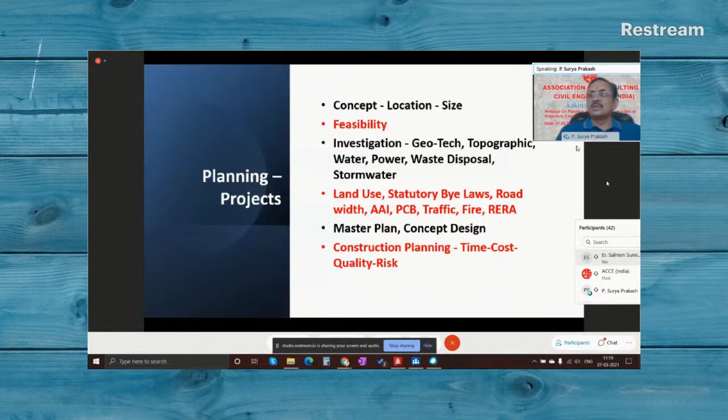And while developing the concept and master plan, we should also keep in mind the construction planning, the time, the cost, the quality assurance or quality plan, and risk assessment. This is a major thing actually. The risk assessment of the project's implementation is a major subject nowadays in construction projects. So we should also be aware of the risk associated with the project implementation.

Next is the projects in coastal districts. What are all the aspects we especially have to consider while planning projects in coastal districts? The first and foremost important point is the exposure condition, particularly when we design reinforced concrete structures. As per IS 456, we have the exposure conditions defined: severe, normal, moderate, and extreme exposure conditions.

So we have to assess the exposure, the salinity in the atmosphere and temperature variation. And if we are designing the structure closer to the sea coast, the humidity and the seawater splashing also. So we have to keep in mind this exposure condition. And then comes the marine clays. This is the biggest challenge in coastal districts whenever we plan. Normally you encounter marine clays in the coastal areas.

What is marine clay? Actually, marine clay is the soil strata which has negative SPT values. That means even when you try to fill the ground, if you fill 2 meters of earth, maybe after a week it will become zero again. So it settles very fast. So marine clays we have to handle very carefully. You should have basic knowledge of marine clays, and never hesitate to consult geotechnical experts for handling these marine clays.

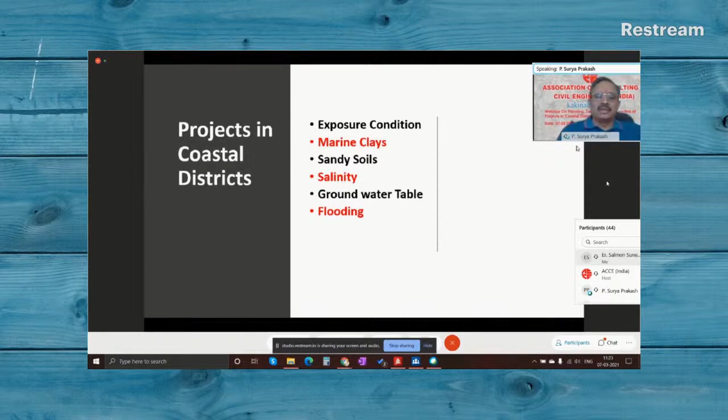So when you particularly cut and level the ground, there will be an issue of flooding. So we have to foresee that and plan the stormwater drainage for such sites, which I will be sharing with you. Tsunami is a phenomenon which we have been coming across in the last 2 decades, 2.5 decades, since 96, if I am correct.

And so tsunami is another risk factor we have to consider while designing projects in coastal districts, particularly the East Coast. The East Coast is prone to this tsunami phenomenon. And the cyclones. Every year, the East Coast experiences at least 2-3 cyclones, and now it is increasing also. Storm surge, like we had in Machilipatnam district, in the mid-70s, if I am correct. There was a big storm surge actually.

So whenever we design projects in coastal districts, the storm surge also we have to study, and ground improvement is a compulsory thing we have to consider for economical and effective foundation design. Dewatering systems. When we handle projects on the sea coast where we have shallow groundwater, we have to do dewatering. Normally the practice in coastal districts is a suction ring main. We put bore wells up to 2-3 meters depth, prepare a ring main around the building, and then we suck the water.

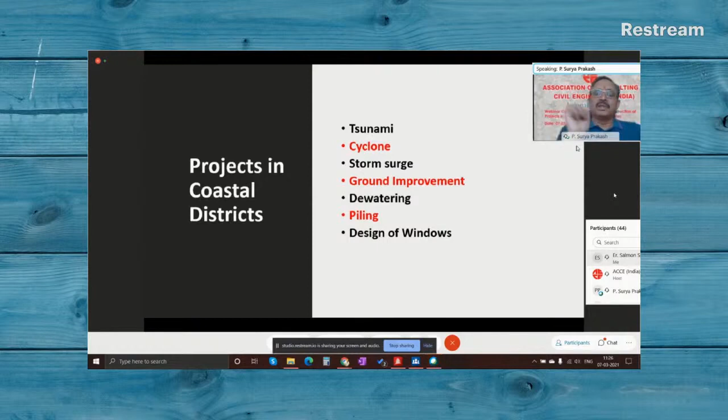Because we design the building for a closed condition, the percentage of openings has a bearing on the wind pressure coefficient we consider. But if we don't design these windows properly and they fail, the openings in the building will increase. And so I have come across many buildings failing because of windows not being designed properly.

Next, sheet piles are another method. In Mumbai, they are very widely used. You can use sheet piles to cut off water ingress into the construction area. Sheet piles or touch piles is another. In Vijayawada and many project sites, we have used these touch piles. Next is jetting, jetty piles. That is, we use a water jet to drive the piles when we have to do piling within the sea coast. Jetting is the method I used about 27 years back in one of the projects in Tupilpalam, Gudur district.

And corrosion is another major issue if we don't take care of exposure conditions and treatment of steel structures, particularly painting. Most of us make a mistake about the application of primer and protective coating. As per code, when we apply primer to any steel structure or even a concrete or cement surface, we have to apply the first protective coat within 24 hours.

Because the objective of applying primer is to neutralize any surface that is exposed to the atmosphere. If you don't apply the protective coating within 24 hours, the neutralized surface will not remain neutral. It will again become basic or acidic. So it's a very important aspect to specify painting of the first coat within 24 hours of applying the primer.

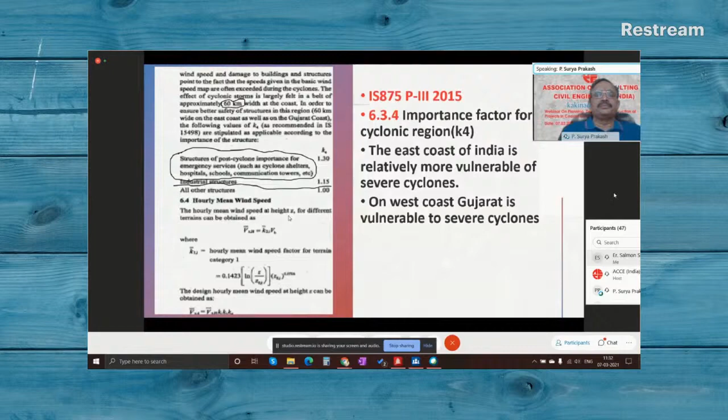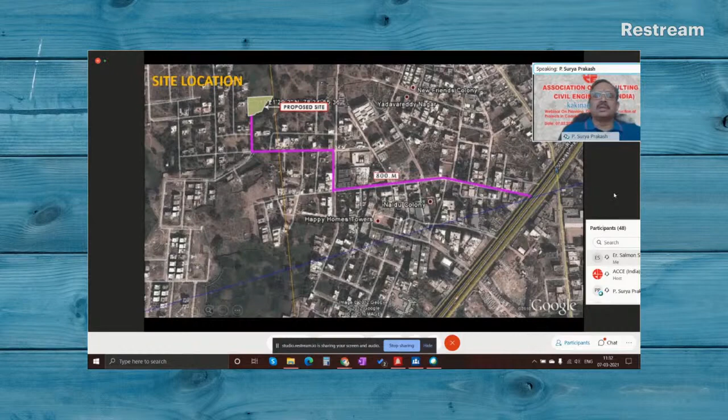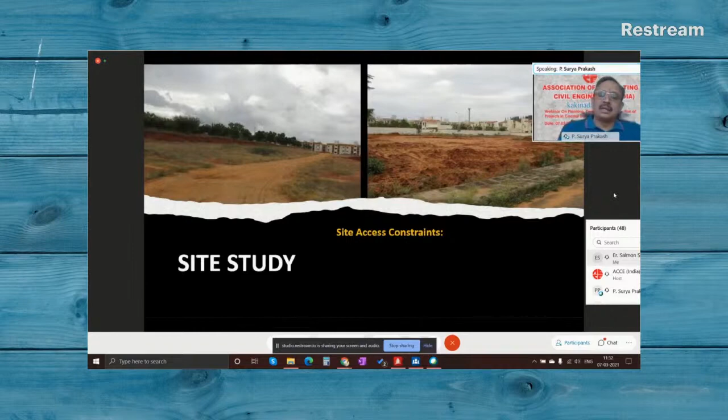Next section that we are talking about is the planning. Whenever we plan the projects, we have to identify the site location and approach to the site from the nearest highway to check the lead and the time taken for transportation. Next is the site access constraints. Sometimes we don't even have culverts that are designed for the trailer loads that carry the materials to the site. So it's very important to understand the access to the site before planning and before drafting the design basis.

Next is the investigation. We have to plan the stages of investigation. The preliminary stage is information to check, investigation of soil, geotechnical, borrow pits, and backhoe pits also. We do this to understand the site in the preliminary investigation, and sites for disposal of surplus earth and topographic survey.

Sorry, somebody by mistake, I think, is sharing the content. Please remove the permission to others to share content so that we will not be disturbed. I'll start. Sir, please continue, sir. Do you have my PPT or should I share now? Sir, please share, sir. Oh, I have to share. Okay. Thank you. So I request you to cancel permission to others for sharing, otherwise we'll be disturbed. Yes, sir. Already done, sir.

Thank you. And geological studies. This is a very important aspect. For all important projects like power plants, we have to study the geological history of the site, so we have geological experts who study it. We all know the Koyna Dam story, where it was built on the Koyna fault, a geological fault, and it resulted in the earthquake. Similarly, environmental investigation, wind roses, climatic conditions by meteorological data.

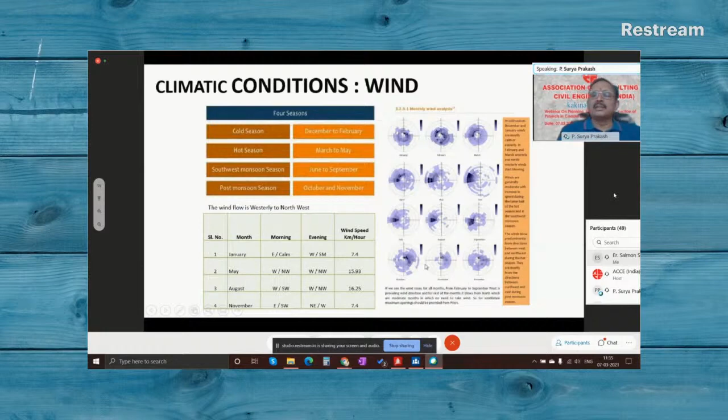So this is a typical climatic condition data, month-wise: cold season, hot season, southwest monsoon season, and post-monsoon season. So we have to have the wind roses like this to understand the direction of the wind. It will help us in planning the structures very effectively.

Next is the sampling of the soils. We must insist on proper investigation. Particularly, I have seen some of the soil reports: at half a meter they encounter refusal strata and leave the investigation there. Even if it is a hard strata, for important structures we have to collect core samples and have the RQD value, rock quality designation. It will give us an idea of the costing of rock cutting and the method of rock cutting, and also the soil bearing. And the calculation of the bearing capacity in hard soils is also a very important factor.

I have come across people using very high factors of safety in estimating the bearing capacity for the rock sample. The method of estimating bearing capacity in the rock is to do the crushing strength, and from the crushing strength apply the factor of safety, and then over that you apply a further factor of safety for the safe bearing. Ultimate bearing, one factor, and then safe bearing, another factor.

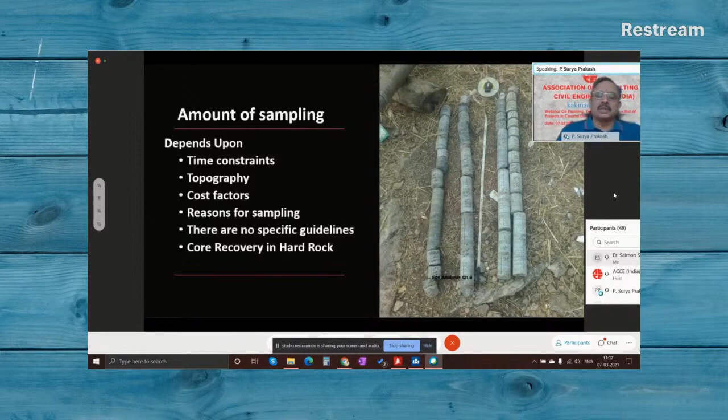So time constraints, topography, cost factors, reason for sampling: we have to decide the sampling very carefully. There are no specific guidelines given in the IS code, but as engineers, we have to plan the investigation depending on the requirements of the project and the core recovery of the hard rock.

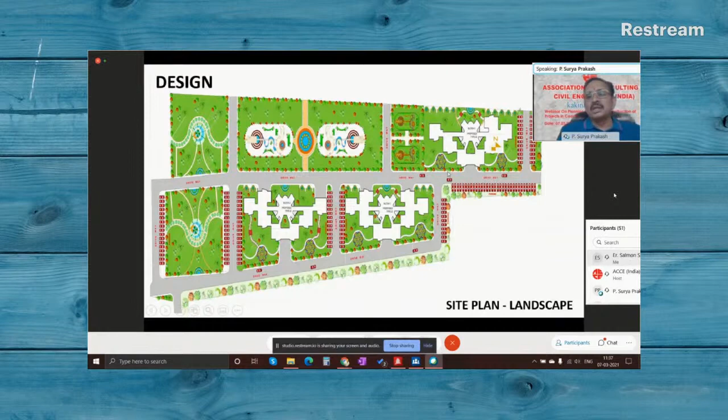So this is a typical master layout. You can see these are the proposed areas in Kudankulam. Actually, we had the opportunity to participate in the design competition, and this is the master plan we did. So the master layout is very important, and then a detailed layout, concept design of each area with the traffic and parking, greenery, and other amenities and utilities we have to consider while planning the layout.

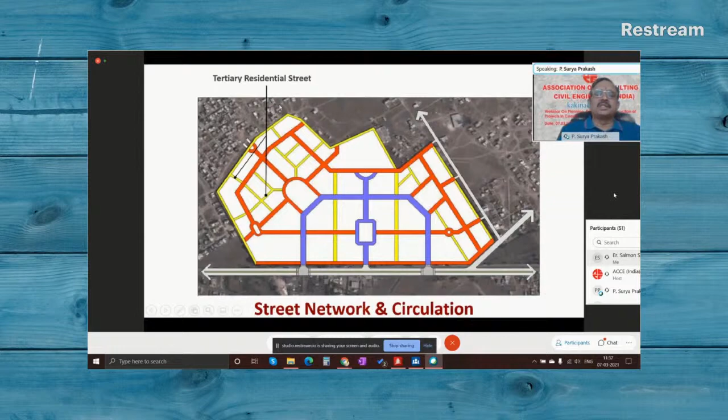Next, the street network and circulation is also part of the master planning which we do. The primary roads, secondary roads, and tertiary residential streets, we have to plan for the traffic circulation. Next comes the building circulation. So this is the units access. You can see this is the shortest path to reach each apartment. We have planned and shown this access, how fast it is, and with a lesser lobby area we can access the units very fast.

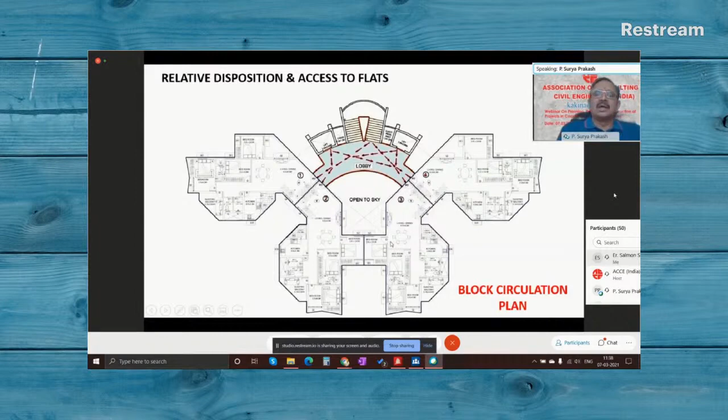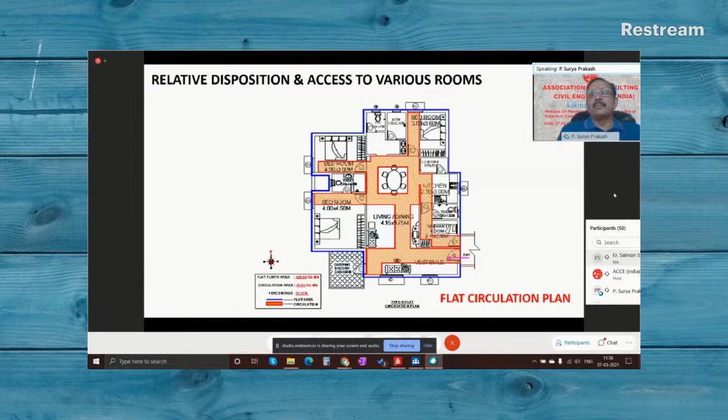And similarly, within the unit, what is the circulation area? Effective area versus circulation area. So these are all the calculations. We have a percentage of circulation of 31%. Here you can see flat circulation. Apart from that, carpet area versus plinth area versus common area, super built-up area, and carpet area versus circulation area. These are all very important, so we must consider these aspects while doing the planning.

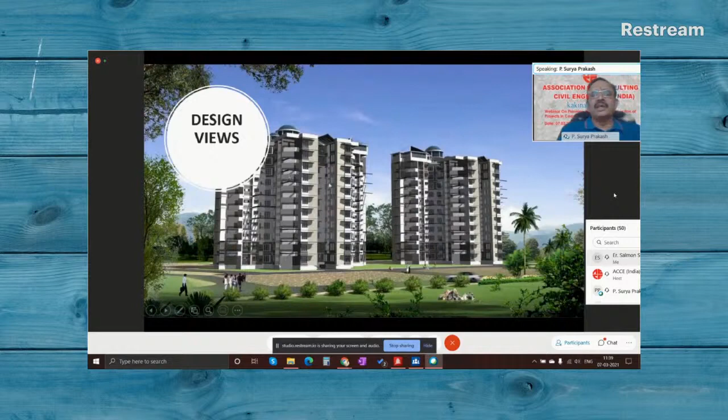So design views: this is the planning done in Seacoast, that's why I'm showing it. We thought that every dwelling unit should have a view of the sea. That's how we planned. Coming to the design, architectural, civil and structural, and MEP: the functional requirement document, FRD, considers the design intent of the client; the requirements are defined in this document. Based on that, we prepare the design brief, whether it is finishes, facade, or functional requirements like toilets or area allocation.

Based on that, we do the design development and coordination, bylaw standards and codes, space, material specification, finish, utility areas, facade, and external services like amenities, landscaping, parking, entry gates, driveways. These are all the things we have to consider in the planning. And detailing, quantity survey, costing, and product specifications. Vendors also we have to consider in the design stage itself. And the financial, technical, and tender approval for procurement before going to the construction stage.

Next is the construction engineering, procurement like contract packaging, site enabling, method statements for execution. I always say that we should never leave the method of execution to the engineers on site. The contractor's planning engineer should prepare the method statement for each activity, whether it is excavation, marking on site, RCC, or waterproofing, and get the approval from the consultant. We have implemented this in projects, so there is no misunderstanding of the drawing and the method of execution. And stage passing is part of construction supervision, where at every stage there should be stage passing done by the engineer in charge on site.

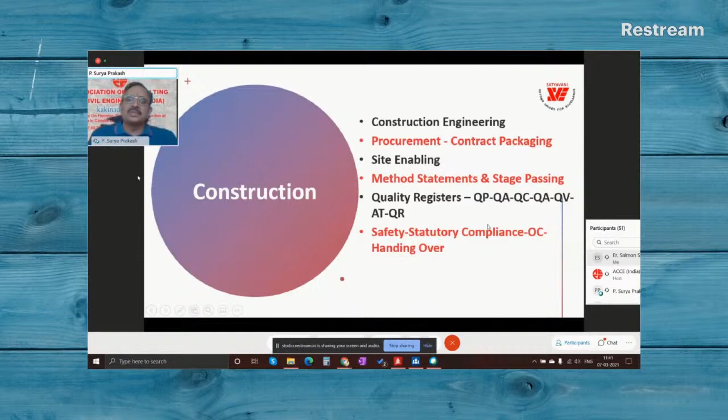Safety, statutory compliance, occupancy certificate, and handing over. So these are all the steps that are very important. So now getting into the core topic of today, that is projects in coastal districts done by our company, case studies where I'll explain the contribution that we have done for various coastal projects, so that it will help you to consider these aspects while planning projects in coastal districts.

So I'll share the highlights. We are used to reading headlines in the newspaper, so same way I have put the highlights of each project so that when we go to that project, I'll share those details. So PalmTech is a project we did in Pedapuram, which is about 50 acres of land, which is sloping towards the highway, and the client wanted to have the leveled ground, and we have foreseen that flooding will be an issue because the project commenced in the month of July, and we all know July is a month with maximum rainfall in East Godavari particularly, and so we have planned the stormwater drain, and the client was joking with me in a lighter vein that you are doing an irrigation project instead of an industrial project.

I said, sir, this is very important because we had a very stiff timeline of 9 months completion for that project. We did the foundation stone and all in July, and it so happened that July month had the highest rainfall of 100 years. So fortunately, because we have considered and constructed the stormwater drainage before commencing excavation itself, my client sent me a photograph of that drain with full water, and said, good you have foreseen this situation. Otherwise, our project would have come to a halt. Imagine 50 acres filling with water, and if you have to do dewatering, you could never complete the project.

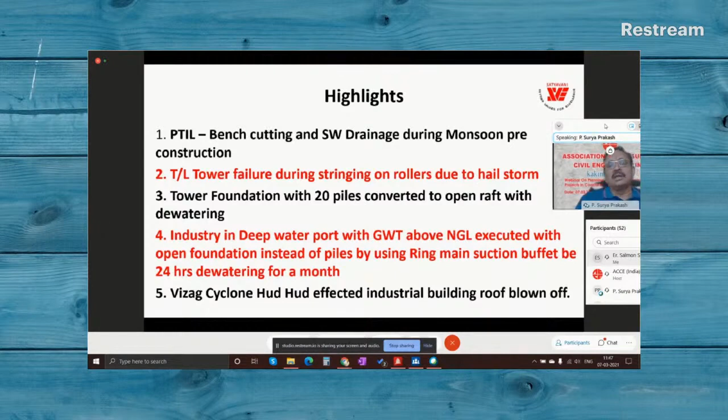Next is the industry we did in deep water port in Kakinada, Arani Agro Oil Industries, now Agrawal Industries. The client wanted to go for pile foundations there. But when I reviewed the soil report of that site, I found that up to 6 meters depth there is a good strata, and beyond 6 meters it is marine clay. Normally we go for pile foundations when the hard strata is at a deeper depth, but here the marine clay extends up to 30 meters depth from 6 meters. So it is never economical to go for pile foundation in such a case, because industrial sheds have less loading compared to normal buildings. So I suggested to the client that we go for open foundation with the dewatering system.

I showed the calculation in a value engineering report where we were saving 20 lakh rupees, apart from saving time, because we could complete the entire foundation system within a month by maintaining 24-hour dewatering for that site. Unfortunately, I couldn't locate that photograph because it is more than 20 years old. But we could maintain the dry condition for a whole month and completed the foundation, and the client was happy because we saved cost and time.

Next is the Vizag cyclone Hudhud affected industrial building. The roof was blown off - a very surprising incident in Vizag, a structure designed by us. When we investigated, we found issues with the anchor fasteners, the self-tapping screws used for the roof sheet. Even the Vizag airport roof was blown off during Hudhud. So it's very important to specify the anchor fasteners and test them.

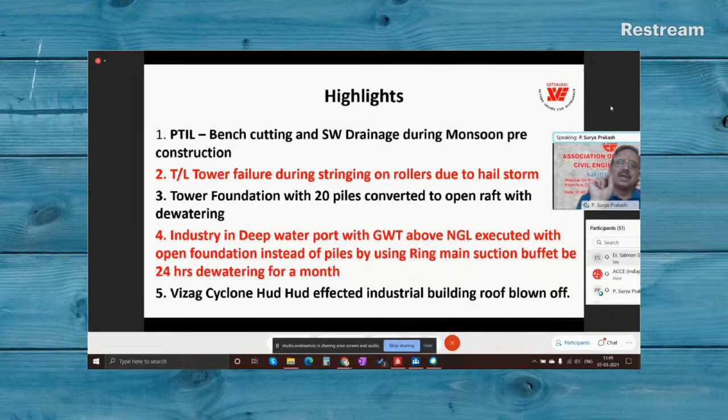The washer that we use and the tightness has to be specified and checked very carefully, particularly Hilti fasteners with neoprene washers. We have to use neoprene washers, not rubber washers, because the cost difference between neoprene and rubber washer is significant, and contractors tend to go for rubber washers. So we have to check these washers also, because rubber washers get decayed with water exposure, whereas neoprene is a material that stays for long. So it's always better to use neoprene washers.

That is very important. Next is the power distribution poles. We were consultants for Government of Andhra Pradesh for hazard mitigation and cyclone recovery, an emergency cyclone recovery project. I'll share some photographs where the distribution poles, normally put along roads and canals particularly in East Godavari, are found inclined. Normally these poles' foundations are not designed properly. We have to design it as a stem foundation, meaning we have to use the shear modulus of the soil for design of this pole foundation.

Next is the plinth level for towers in paddy fields. This is another thing we observed - most of the towers had corrosion in the bottom stub portion right above the plinth level, because the plinth level used to follow 230 mm, 9 inches above ground level. In paddy fields, if you see the watering they do, the water itself will be about 1 foot. And imagine if there is a rainy season, the water level will rise, and because of the exposure condition there will be extensive corrosion in the leg, which is important. So we have specified an increase in the plinth height.

Next project we did is in Cochin, Hyquip. There is marine clay, and we started the ground leveling, and it used to sink. So we used prefabricated vertical drains so that you take out the water as you fill the soil. This is a ground improvement technique which we adopted, which I'll also share.

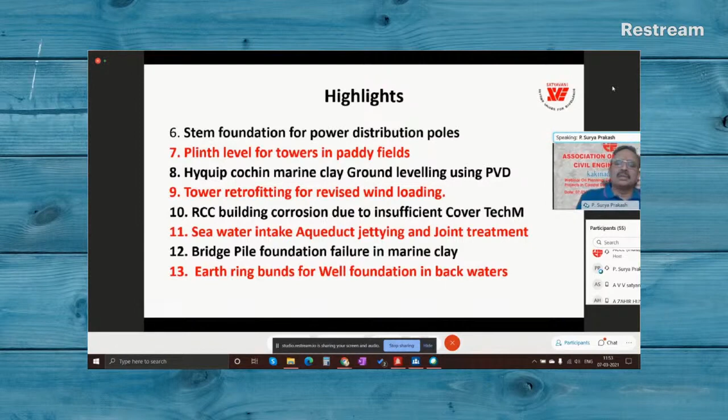Earth ring bunds for well foundation in backwaters, and roof sheeting anchorage - clamps, screws. Nowadays we have standing seam, seamless roofs, where we use clamps, so we must check and inspect these clamps very carefully. If using screws and washers, we must check those too.

For expansive swelling soils, proper design of piles, or treat the foundation soil - that's very important. No saline water should be used in construction, so check the water quality in coastal districts, and provide treatment if required to remove salinity in the soil. We mostly use sulfate resistant cements in coastal regions.

In fact, in our very first project back in '94, we used sulfate resistant cement. Seashore sand must not be used - that is very important. Many people tend to use pit sand, which is also not good. We have to use sand conforming to the gradation specified in IS 383.

Scouring is another important phenomenon. On the sea coast you will have scouring of soils, erosion, soil erosion due to wind. We have to consider these aspects.

Uplift anchorage at every stage of load transfer and side thrust is very, very important, because industrial buildings particularly will experience uplift in the structure. We have to check the anchorage, do uprooting tests, and check the foundation and structure at every stage, because cyclonic winds will lift the structures. So we must check uplift anchorage at every stage.

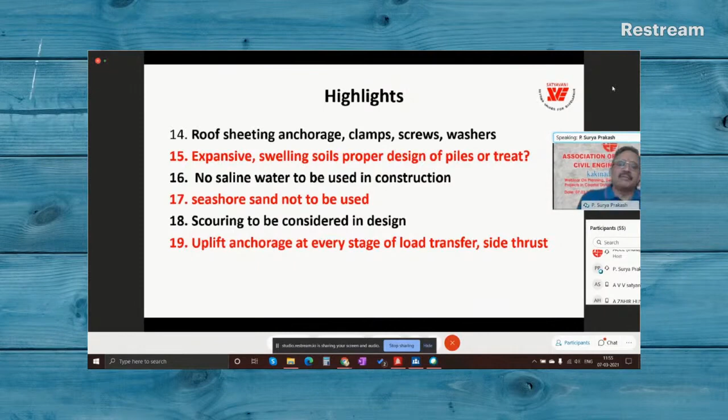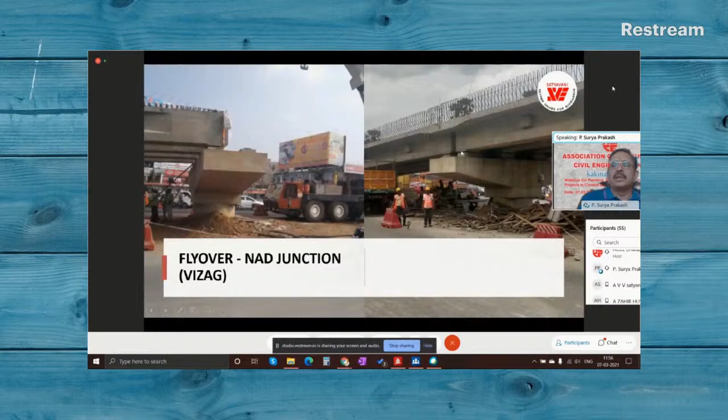Now I'll share photographs of the projects. This is a flyover rotary management system we are doing in Vizag, nearing completion. We have completed the design and execution is in progress. This is the NAD junction rotary management system with precast I-girders - this is the design we did.

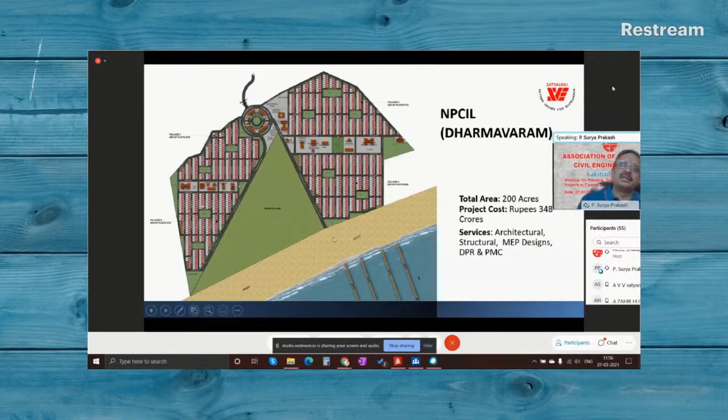This is in Srikakulam, where we are doing a township for which the DPR has been approved - a 350 crore project with 2,000 houses. This is on the sea coast, and there we have planned a fishing harbor kind of facility for the fishermen who are going to live here. These are some views of this project, and while planning we considered all these aspects.

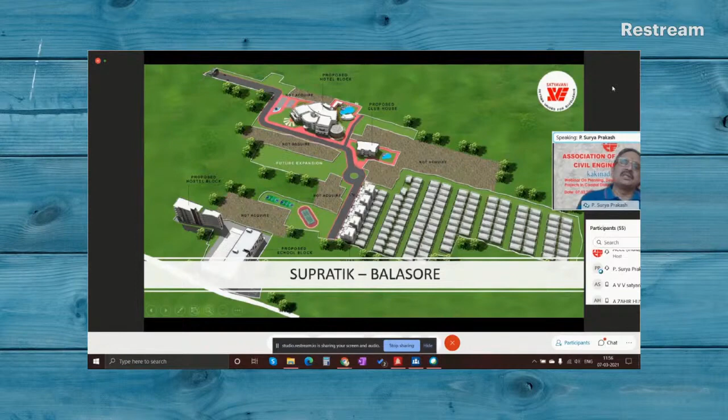Next is Balasore - we have done about a 60-acre project. It's a master plan with villas, a school, and a star hotel with a convention center, which was planned by us and executed by the client.

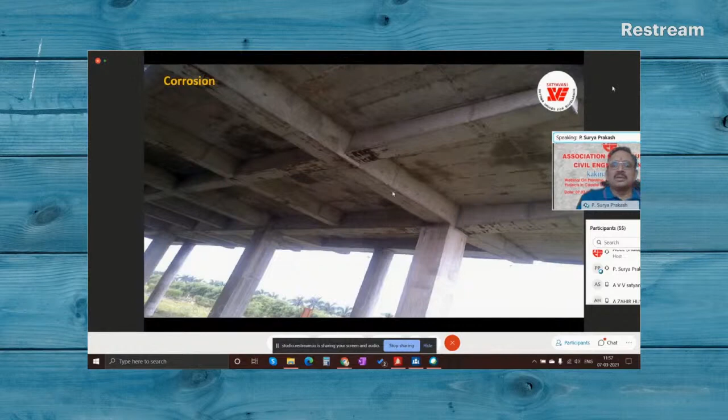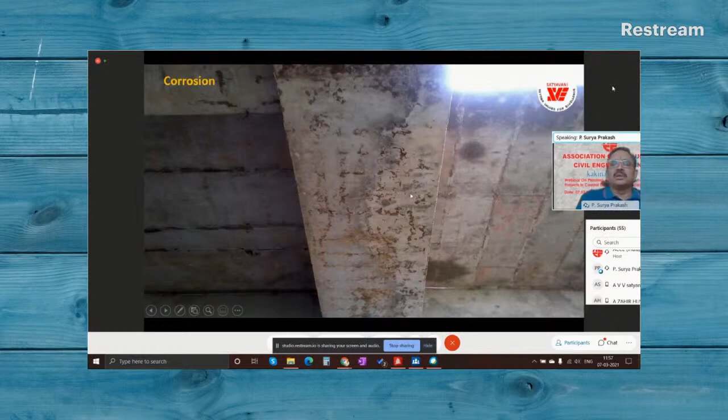You can see this corrosion of stirrups and the main bars in the beam due to corrosion. And this is the column - you can see the ties, column ties, and the main bars. You don't even need to do a profometer test to see it.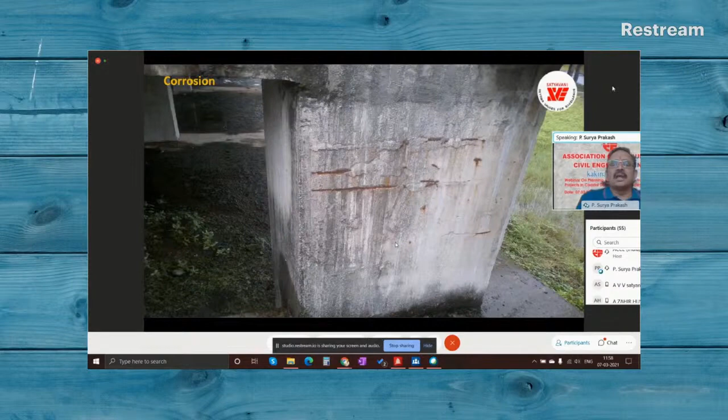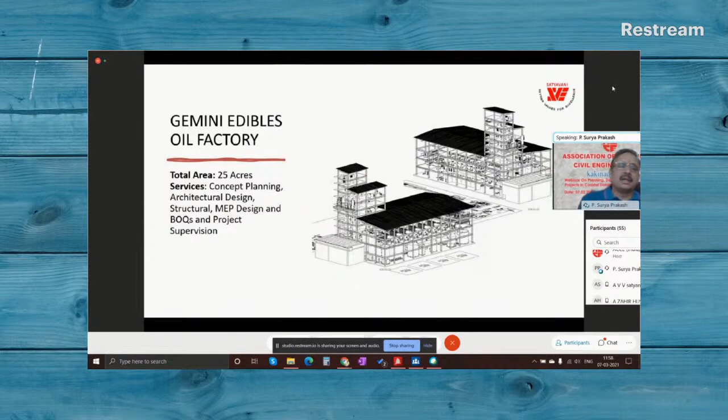This is another edible oil factory we did near Kakinada. This is also a completed project, a steel and composite structure, recently completed last year. These are the pictures of completion.

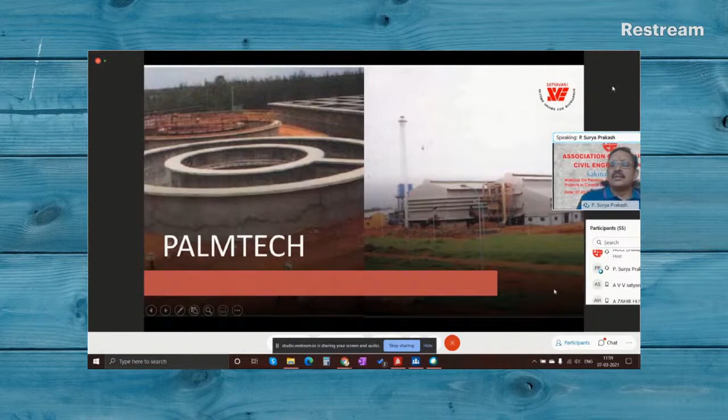This is a palm oil mill project in Pedapuram near Kakinada. This is where I said we had stormwater drains. This is the layout of the project. We have 50 acres, so we did these stormwater drains before even commencement of the work, and this whole area was excavated to make a level ground. You can see this stormwater drain here. During construction, a 3-meter width and 3-meter depth drain was executed, and it worked perfectly.

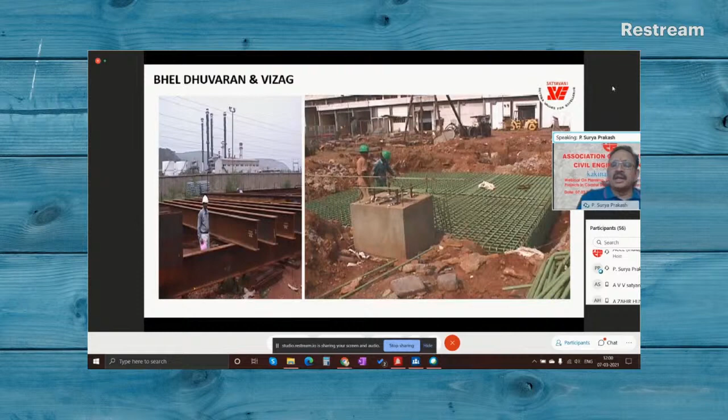In Vizag, we did a gas turbine project for HPCL through BHEL. You can see we used protective coating to the rebar in the foundations and structure. This helps in reducing the corrosion we saw before with protective coatings, but in implementation, we have to ensure the painting is done adequately. This is the HPCL power plant.

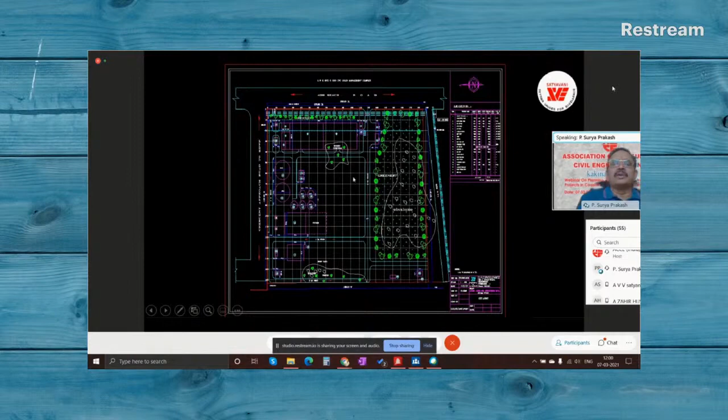This is the layout of the project, which is on the sea coast, and the ground level was half meter below the sea level, mean sea level. For this entire plant area, we did the dewatering system and maintained dry condition at 2-meter depth, in spite of the water table being above the ground, and we could successfully complete it.

These are photographs during construction of this Arni Agro project. You can see the ground, it's all moist ground. In spite of that, we could maintain dry condition and completed the project on time.

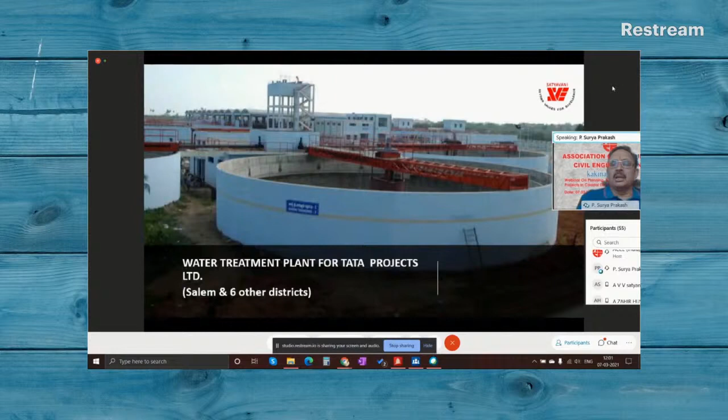These are the water treatment plants and sewage treatment plants in Salem and 6 other districts in Tamil Nadu, which we have done, about more than 100 crore project. We did it for Tata Projects EPC project, as EPC consultant.

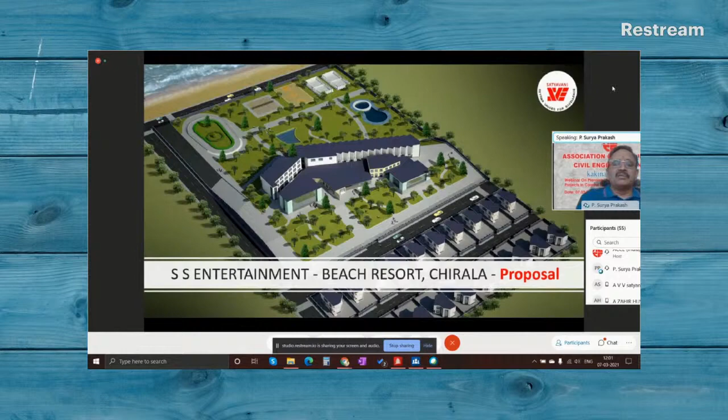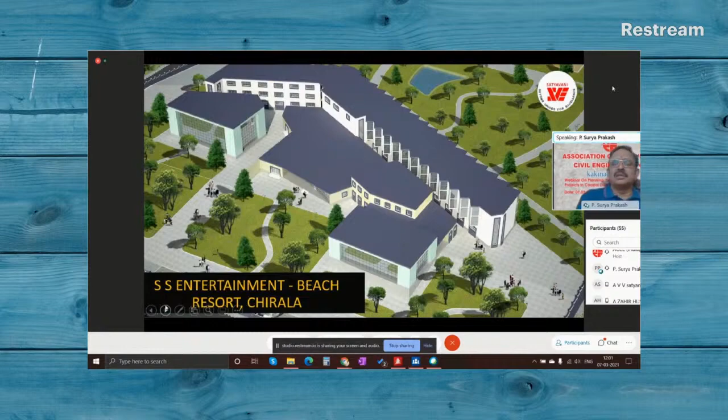This is another resort proposal we did near Chirala. This is the concept we have given, to ensure every room will get the view of the sea. That's how it is planned. And there are other options which we have done for the beach resort.

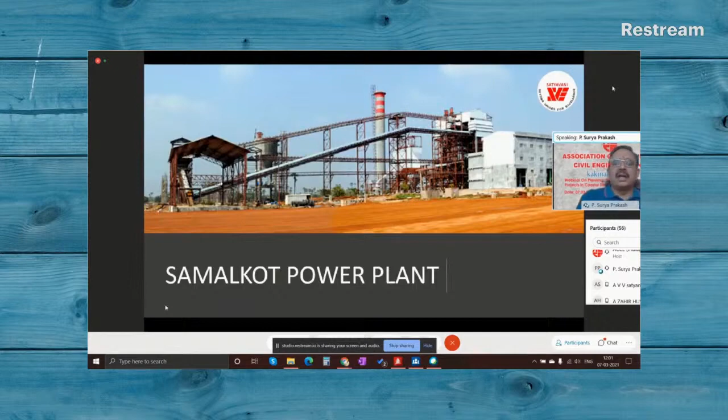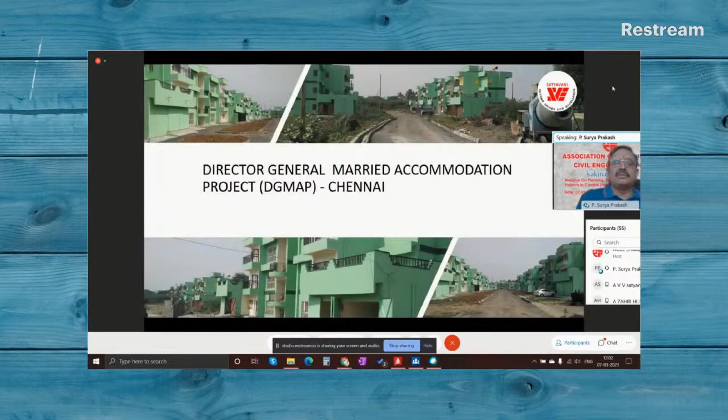This is a Samalkot power plant, balance of plant works we did. And housing we did in Chennai for defense. This is married accommodation project. These are all the completed photographs of this project in Chennai, this is the married accommodation.

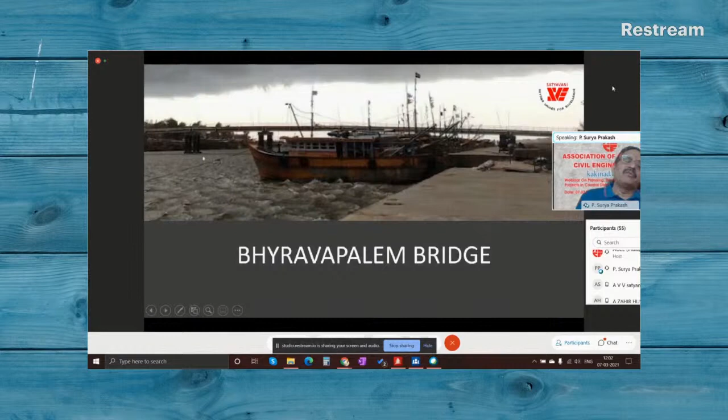This is a bridge we did in the backwaters at Bhyravapalem, mainly for cyclone evacuation and AP hazard mitigation. Here we used the ring bund and well foundation, caissons. This is the photograph of that.

In Nellore, we again did hazard mitigation bridges for the irrigation department. And this is a mall and multiplex in Ongole, where we used precast driven piles, not bored cast-in-situ piles, so driven piles are used here. Because here too the water table was at 2-meter depth, we didn't go for open foundation, and we used precast spun concrete driven piles.

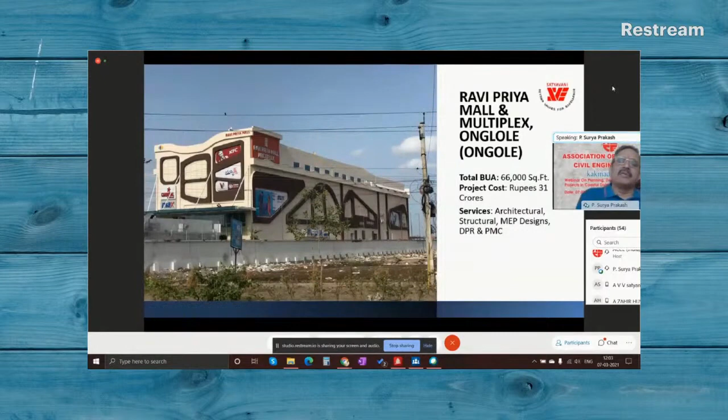And interim capital of government, Andhra Pradesh - we also did the RFP for Secretariat. This also comes under coastal area. The structure is designed for 8 floors, but they have executed only 2 floors.

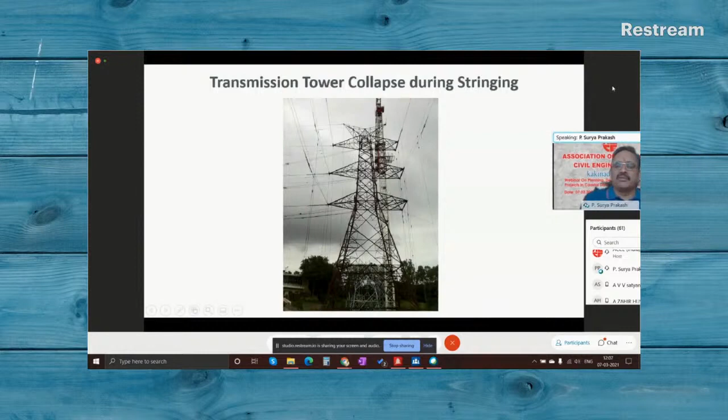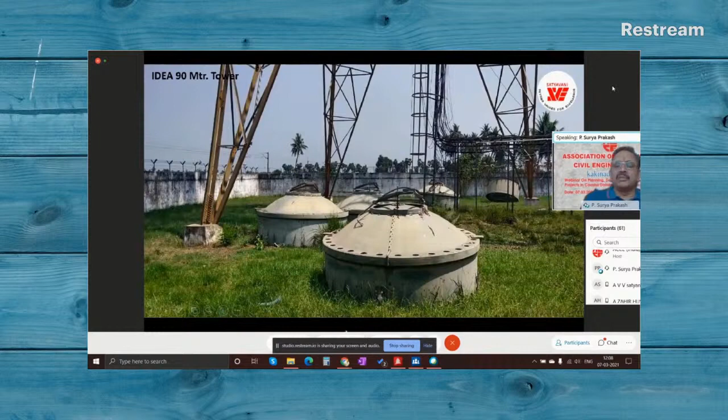So this is the 90-meter tower I was talking about in Kakinada for Idea Cellular. It's a tower designed by us, and the foundation in Kakinada, because we had to convert from pile foundation to raft foundation, which was successfully executed. So this is the foundation in a sandy soil. And this is the drawing for an annular raft. With the concept of annular raft, we did the tower foundation as a raft foundation.

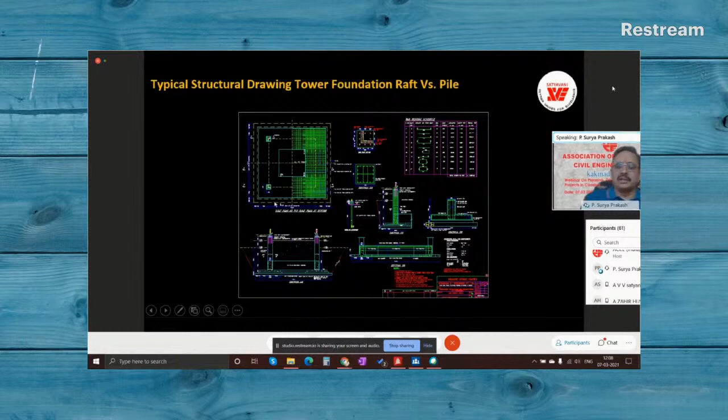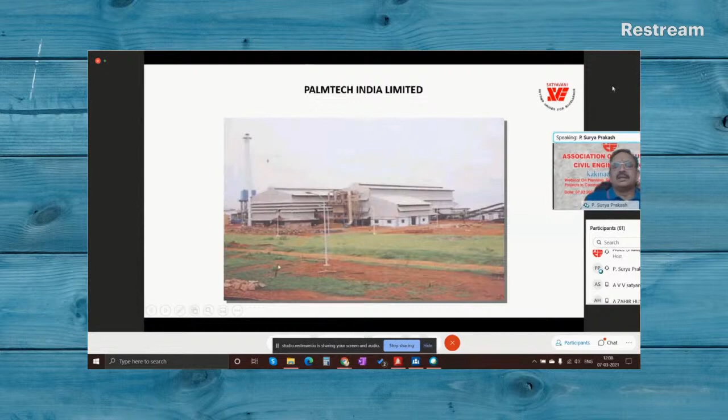This is the palm oil mill I was talking about, which we completed 6 days ahead of schedule. So you can see the stormwater drain here. And these are the oil tanks. Oil tanks are an interesting foundation; we always design with hoop tension. The force transfer is by hoop tension because the bearing is not critical here because it's oil. So ultimately we transfer the load by hoop tension.

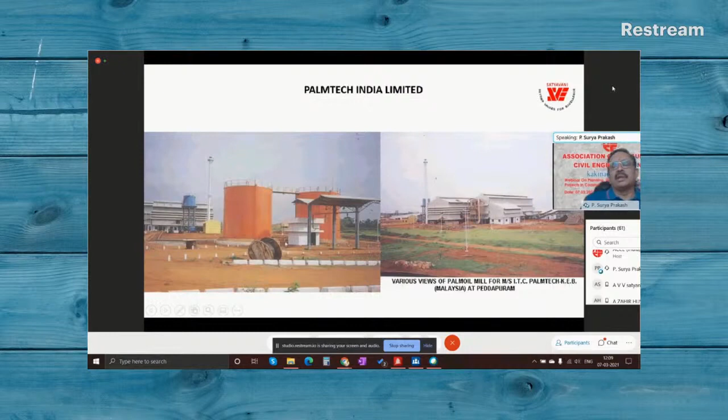So here we just make a ring beam, fill it with sand, and on the sand we put the bitumen carpet and erect this steel structure, because the whole load transfer is by hoop tension, because the weight of oil is less compared to water even, and so the bearing is never a critical thing. So very interesting design. This is the aqueduct I am talking about near Gudur in Nellore district.

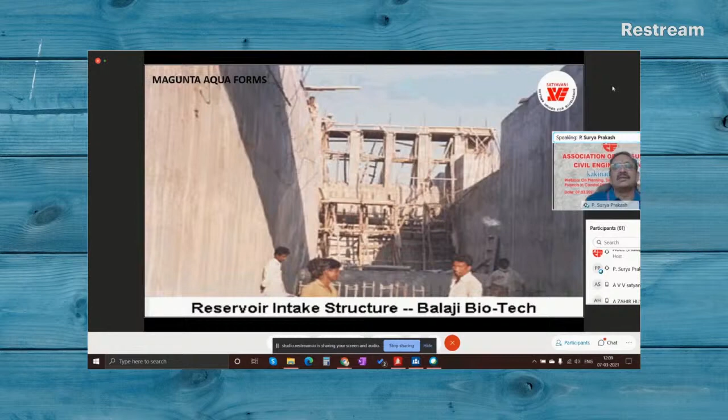So this is our first project done by our company, a 1.2 kilometer long aqueduct with seawater intake. You can imagine the cover aspects, the protective coatings, water barriers and expansion joint treatment in this were all challenging. So we have successfully done it. And these are the photographs during execution about 27 years back.

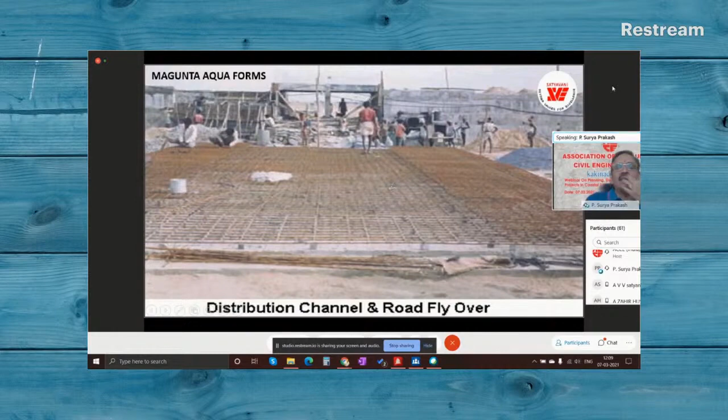So this is a flyover over the water aqueduct, and we have designed the aqueduct with adequate cover. The latest we did was last year during the lockdown period. We did the review of the DPRs for the fishing harbors in 4 locations in Andhra Pradesh.

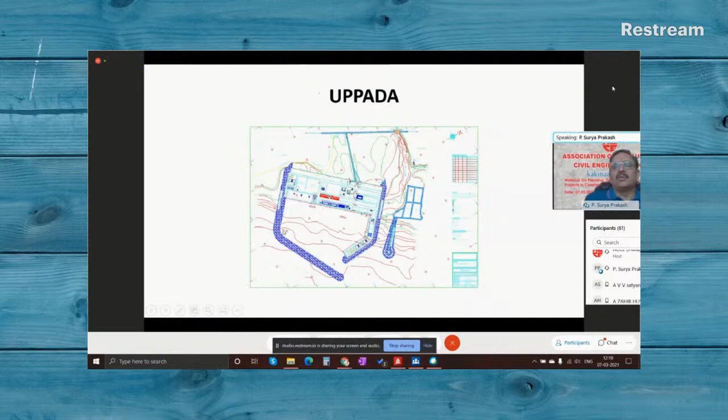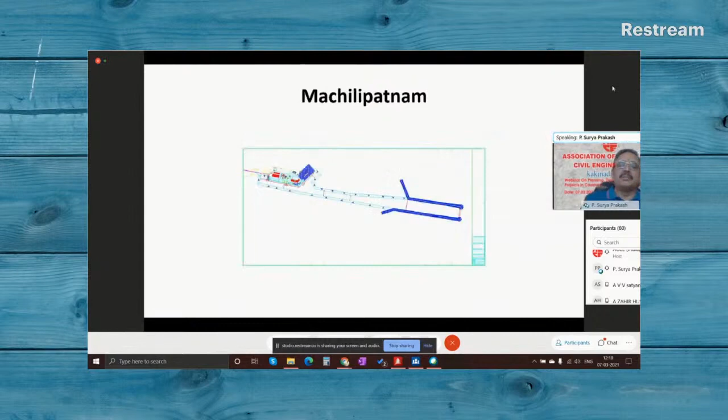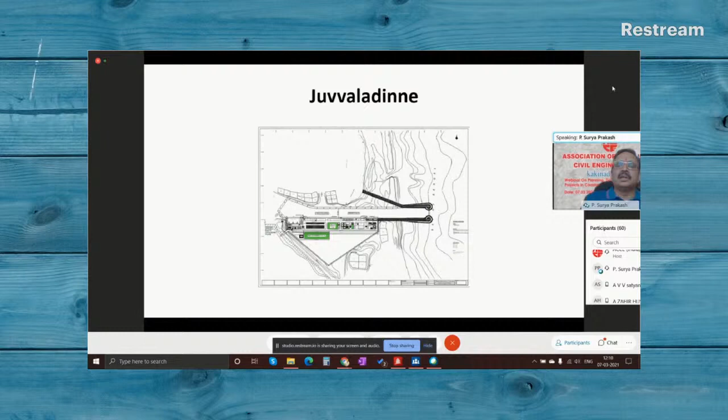So this is Uppada near Kakinada. So this is the fishing harbor, and this is the breakwaters. So we have done the DPR validation and submitted. And another fishing harbor is in Nizampatnam, and another fishing harbor is in Machilipatnam, and last one is Juvvaladinne. So these are all the 4 fishing harbors for which we did the review of the DPR and submitted.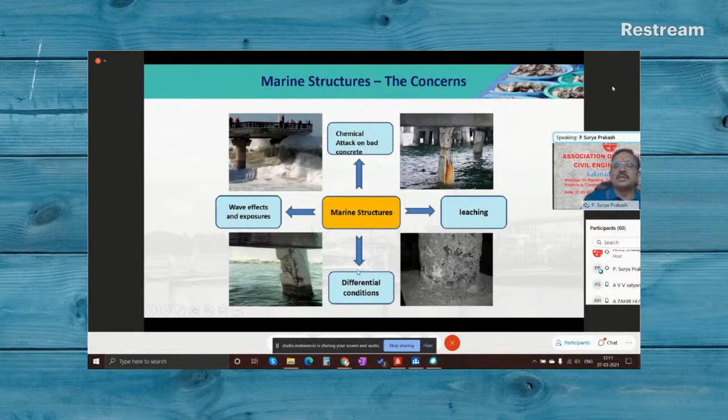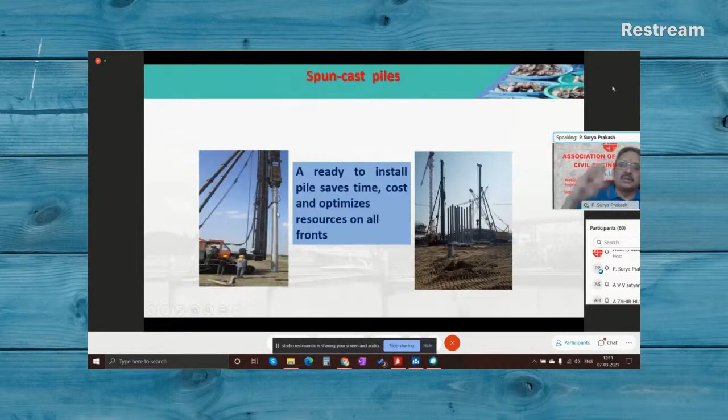So we proposed this spun precast pile in that project for all the backwaters and foundations for the structures. So these are factory-made piles, so they will have very good resistance, and the grade of concrete that we can achieve with the normal mix design is M80 grade because of the spinning that we do. And this is the method of preparation of this spun concrete.

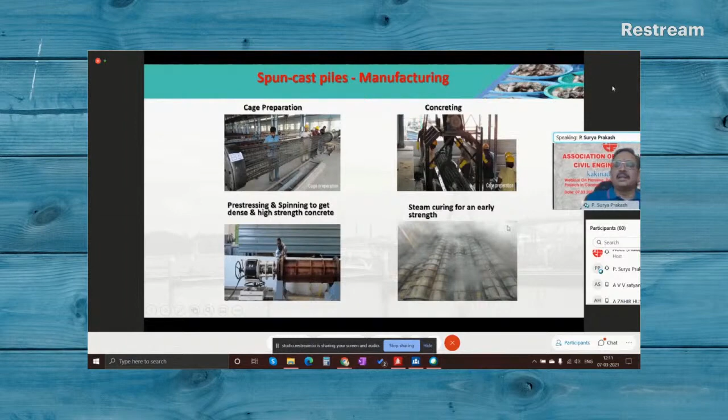I'm associated with the factory for last 35 years, and I proposed them to go for these spun piles. Now they have the factories in Vijayanagaram, Narsarapet, and Hyderabad also. So this is the pre-stressing and spinning and then steam curing here. So these are all the stages of casting, and load test is done on the pile and transported on this. And you can drive the piles in hours time. So you can have the ready to erect piles, capacity up to 280 tons.

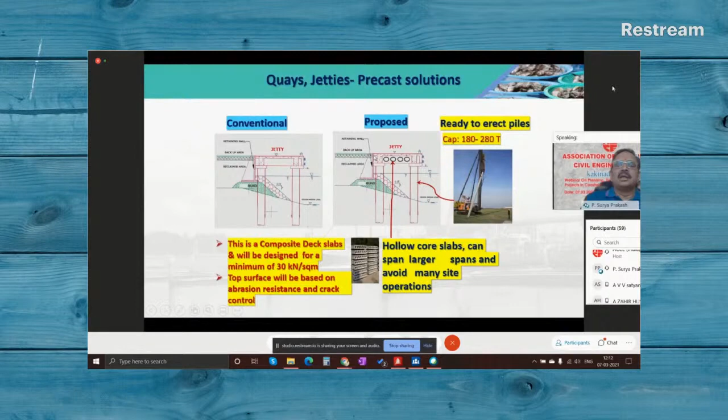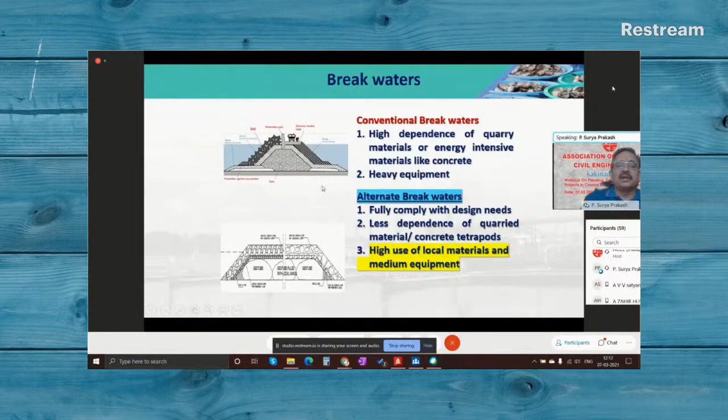And we also proposed a hollow core for jetty instead of conventional concrete, because precast hollow core we can erect fast and do the screed concrete on top. This is for the jetties and quays. And breakwaters also, alternative breakwaters are proposed with the geotubes to reduce the filling and time-consuming aspect of the filling for these breakwaters. So this is the main presentation from my side.